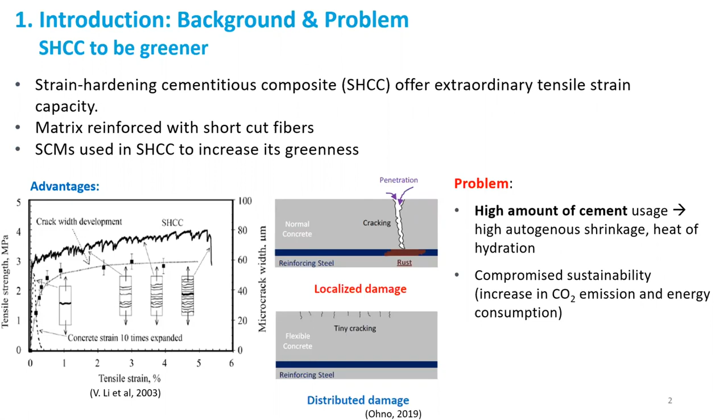However, SHCC has its own problems because preparation of SHCC needs a high amount of cement, which could largely compromise its sustainability. Researchers have already applied SCMs into the SHCC to increase its greenness. However, there's still much room left for us to improve.

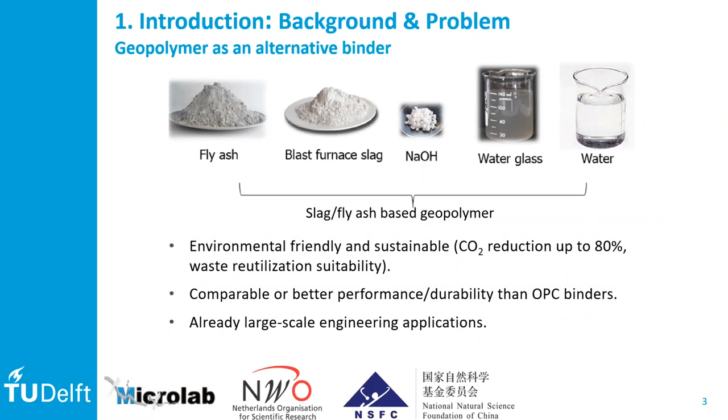Geopolymer as an alternative binder, on the other hand, is environmentally friendly and sustainable. It also has comparable or better performance and durability than OPC binders. So it makes us wonder: what if we substitute the cementitious matrix in the SHCC by geopolymer ones? So why not make a strain hardening geopolymer composite?

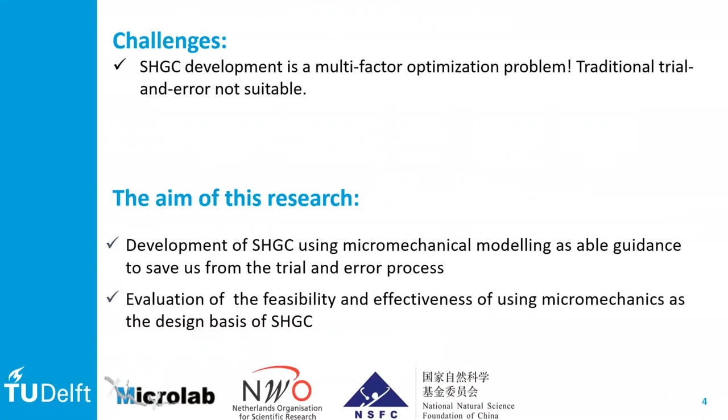Why SHGC? However, we do have to note the challenge here: SHGC development is still a multiple factor optimization problem, so the traditional trial and error method is still not suitable for development of SHGC. So the aim of this research is to develop SHGC using micromechanical modeling as a guidance to save us from the trial and error process, and also to evaluate the feasibility and effectiveness of using micromechanics as the design basis of SHGC.

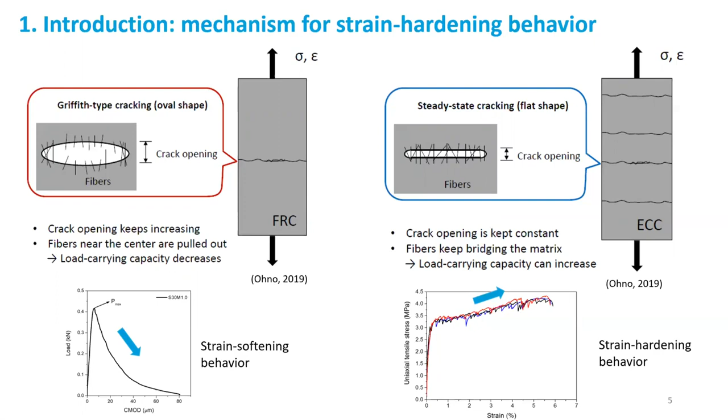Before we go deep into the presentation, I would like to make a brief introduction on the mechanism for strain hardening behavior to happen. The most important thing for strain hardening behavior is a steady state cracking of the composite under tension. Otherwise, you will have a Griffith-type crack, which finally leads to strain softening behavior of your mixture. This is what normally happens with conventional concrete and conventional fiber reinforced concrete.

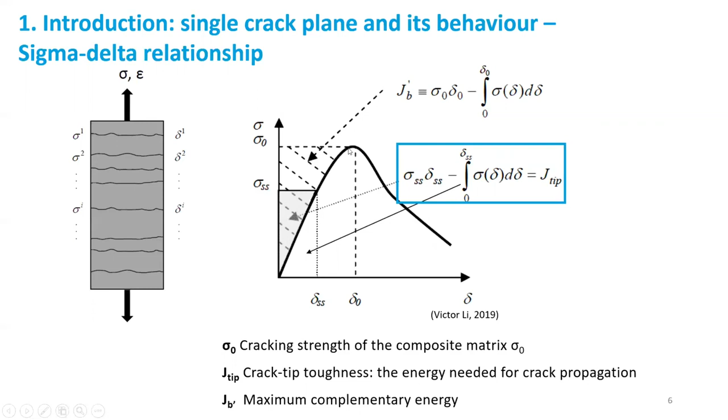This part is the crack bridging strain energy, and another part is consumed by the crack tip opening during crack propagation, which corresponds to the J-tip. Another very important term is the complementary energy, which corresponds to the left part of this equation, and the maximum complementary energy is actually calculated using the crack bridging in the sigma-delta curve.

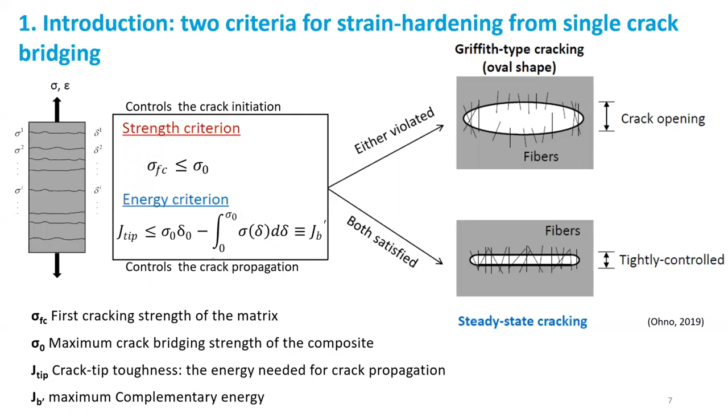To ensure the energy balance, we have two criteria. The first is the strength criteria, which controls the crack initiation. The second is the energy criteria, which controls the crack propagation. When both criteria are met, we can have a steady state cracking, and finally we'll have a strain hardening behavior of the composite.

To further quantify the two criteria, we introduce the so-called pseudo strain hardening index, PSH index. The first is the strength PSH index, PSHs, equals to the fiber bridging strength over the first cracking strength of the matrix. We also have the energy PSH index, PSHe, equals to maximum complementary energy over J-tip of the matrix. Theoretically, the values for both indices should be higher than 1.

However, as reported by researchers, they found in experiments that a PSHs value of 1.5 and a PSHe value of 3.0 is more beneficial for a robust strain hardening behavior to happen.

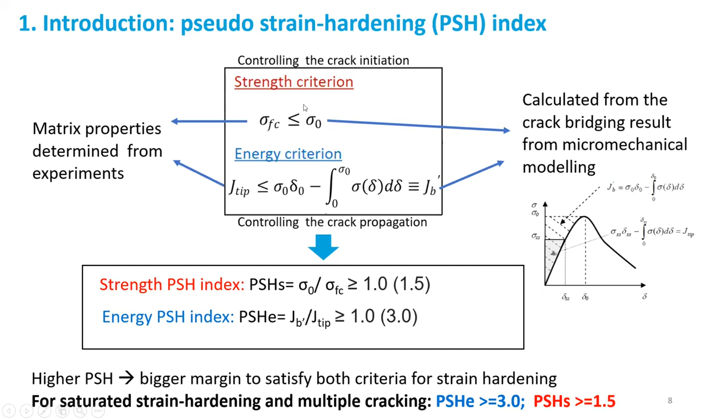For the calculation of the PSH indices, we use matrix properties determined from the experiment: this is the first cracking strength of the matrix, and this is the J-tip of the matrix. We also use output from the micromechanical modeling, shown here on the right-hand side, which is the fiber bridging strength and the maximum complementary energy.

A brief introduction of the micromechanical model we're using: we use the micromechanical parameters to build up the single fiber pullout behavior, which depicts one fiber bridging one single crack. Then we use the fiber distribution function at the crack plane to scale up to the composite behavior and come up with the sigma-delta relationship as the output. From this sigma-delta relationship, we can calculate the maximum complementary energy and crack bridging stress. These values could be further used for calculation of PSH indices to evaluate the strain hardening potential of the mixture.

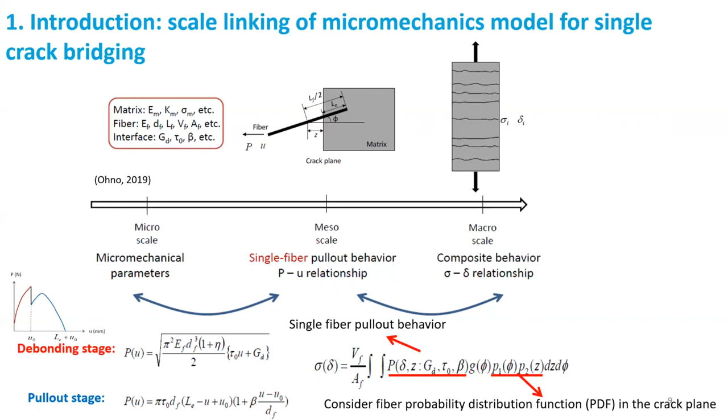So the starting point of this study is a geopolymer matrix we developed before, with very good mechanical properties and workability.

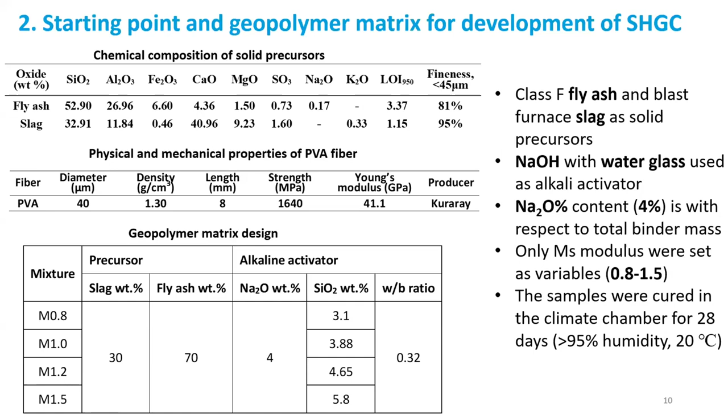So we use slag and fly ash for the matrix, and sodium hydroxide and sodium silicate solution as alkali activator. We fix all parameters except for the silicon modulus, because we found that matrix and interface properties are quite sensitive to the silicon modulus. We cure our samples in a climate chamber 28 days before testing, and PVA fiber was used for the composite and also single fiber pullout tests.

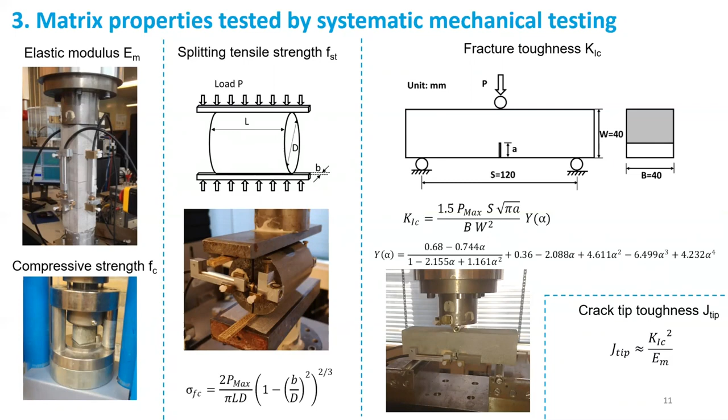We also determine the interface properties using single fiber pull-out test, as shown here. We are using a precision cutoff machine to cut the fibers and the specimen into very thin slices, and we are using a micro compression tension device to pull out the fiber, as shown in the video.

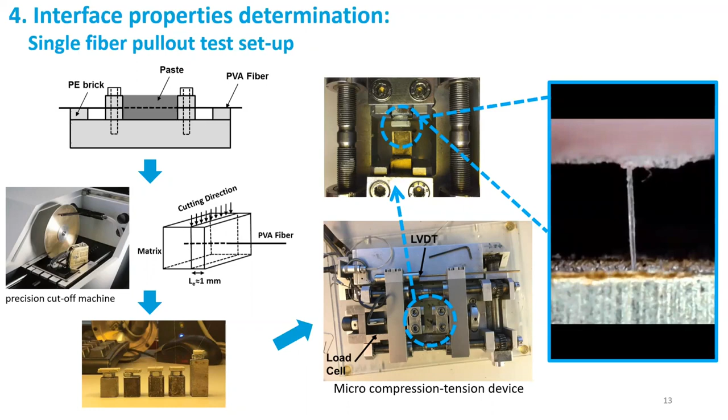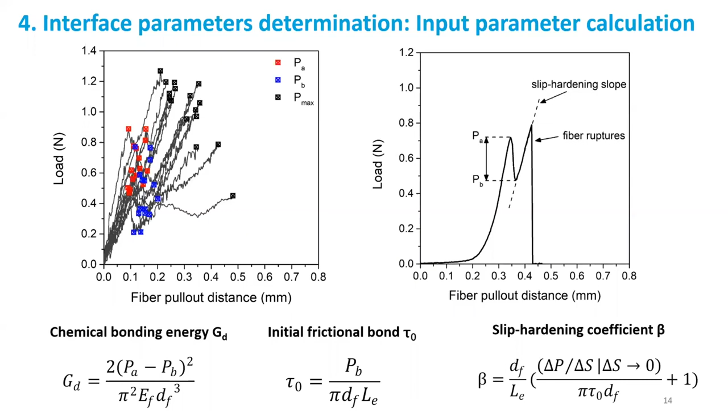So here shows the results from the single fiber pull-out test. From these results, we can calculate three very important interface inputs: the chemical bonding energy GD, initial frictional bond tau 0, and also the slip hardening coefficient beta. So the results are further shown here in a box chart.

As you can see here, the interface properties show a relatively higher standard deviation in comparison to mechanical properties. However, this is quite reasonable, since the heterogeneous coverage of the reaction product on the fiber surface is actually inevitable at this scale.

So we also identify the consistency between the GD and the beta, which both factors are more chemically related to the reaction product. And also the frictional bond is more physically related to the fracture surface roughness, and also has some influence from the shrinkage-induced stress onto the fiber surface.

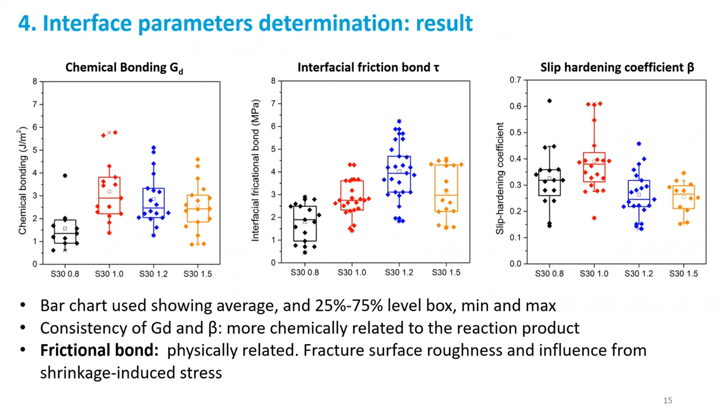As the first step, we're using micromechanical modeling to aid the selection of suitable fiber volume and fiber length. So what we do here is set the energy and strength requirements, which is PSHe equal to 3 and PSHs equal to 1.5, which are normally used for SHGC materials. So we try to incorporate all the matrix properties and interface properties tested from the experiment into the model, and we only try to change the fiber volume and fiber length to meet the two requirements.

This is done by inversely fitting, and all the results are shown on the left. As you can see here, all of the curves, both the black one and the red one, the points on the curve are the critical values to meet both requirements. And the area above both curves is actually the one suitable for selection, which meets both PSH requirements.

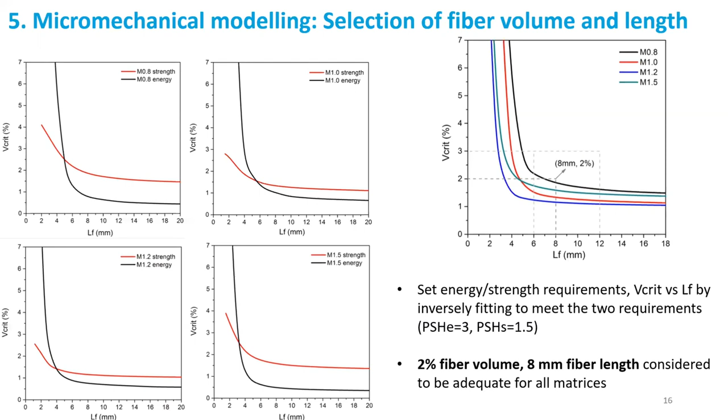And since we want to choose the fiber volume as low as possible, to reduce the cost and to avoid further mixing problems in the future, finally we choose the fiber volume at 2% and also fiber length of 8 millimeters for all matrices.

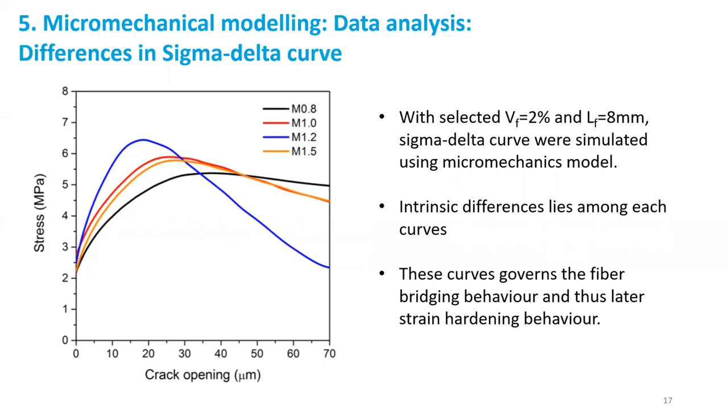So afterwards, we try to incorporate these two values along with the interface and matrix properties, and use micromechanical modeling to calculate the sigma delta relationship. You can already see that for all of the mixtures, there are very intrinsic differences among them, which means they should have different strain hardening behavior.

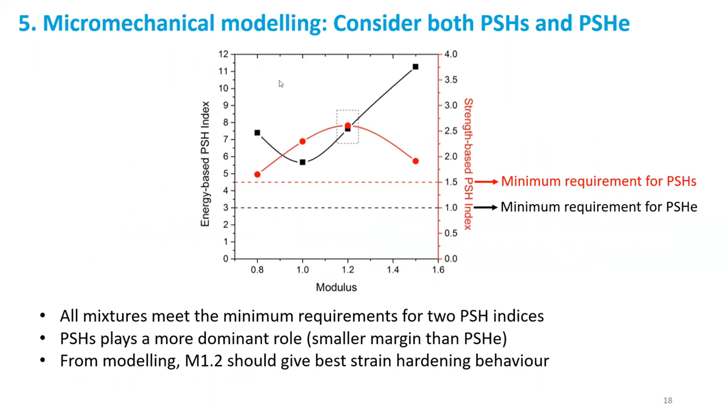And finally, from the modeling, we can already see that the mixture M1.2 should have the best strain hardening behavior, because both of the PSH values are very high.

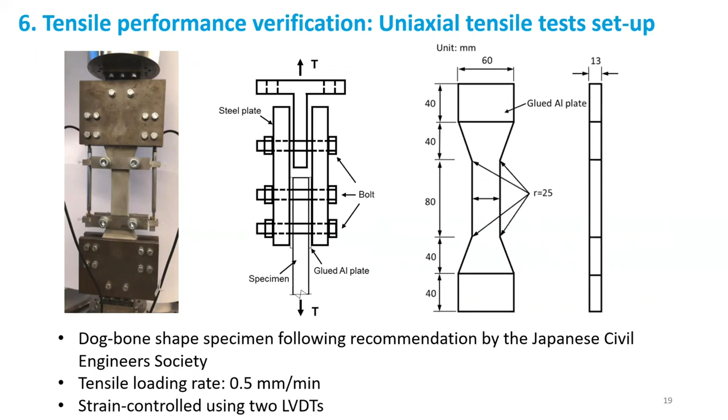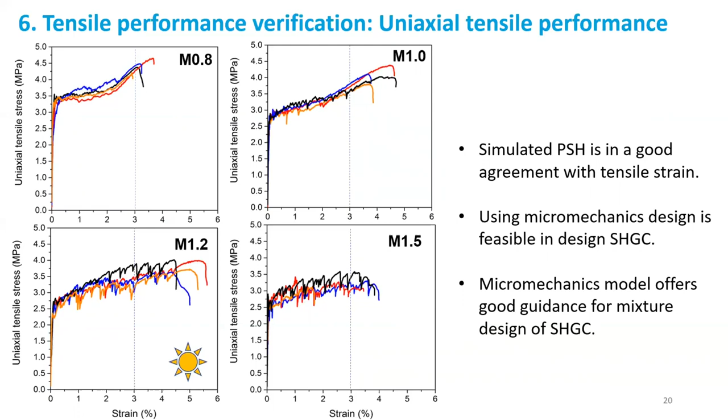And finally, we try to use uniaxial tensile test to evaluate the tensile performance predicted by the micromechanical modeling. All the results are shown here. It is found that the simulated PSH, especially the strength PSH, is in very good agreement with the tensile strain capacity. And more importantly, as predicted, the mixture 1.2 yields the best performance.

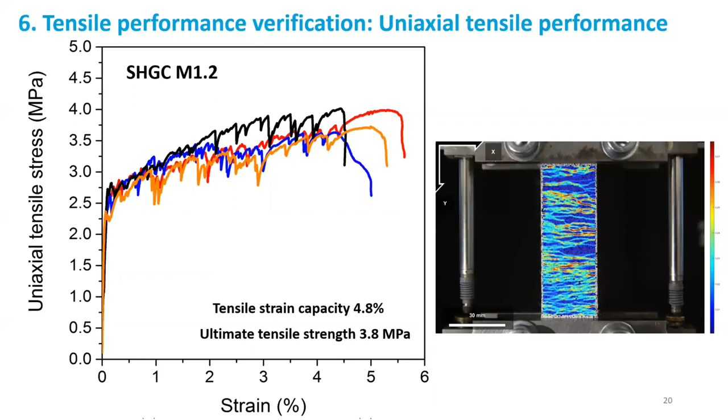And with this, we also try to conduct the DIC analysis on the multiple cracking behavior, and this shows that this mixture almost shows saturated multiple cracking. So with the tensile strain capacity of 4.8% and ultimate tensile strength of 3.8 megapascal, this SHGC mixture seems very promising and is also comparable to conventional SHCC with moderate strength.

So finally, come to the conclusion. I will not go in deep, but the most important thing is that this study demonstrates that micromechanical modeling is a very effective tool for development of SHGC. It can help us assist the selection of suitable fiber properties while predicting the potential tensile performance.